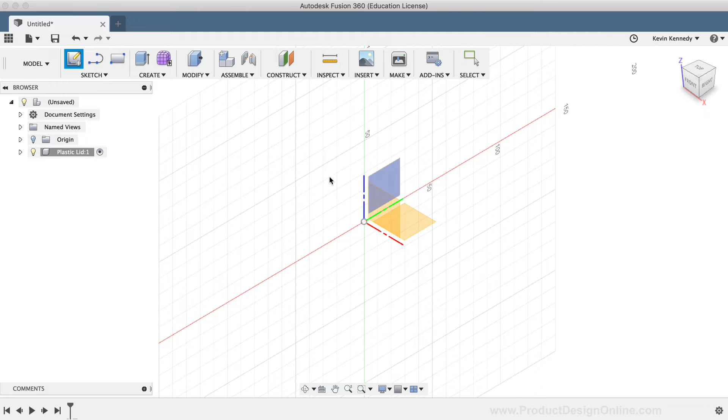Now, what I'm going to do is draw half of the side profile of the lid. Then, I'll use the Revolve tool to make the sketch a three-dimensional object. I'll click Create Sketch in the toolbar, and I'm going to select the front plane or the XZ plane.

Next, I'll hit the keyboard shortcut letter L as in Lima to activate the line tool. I'm going to draw the profile shape out and give it some rough dimensions. And then afterward, I'll show you guys how to set up user parameters which will help drive the model.

With the line tool active, I'll click the center origin point and I'll move my mouse cursor upwards. Then I'll type out 3 millimeters for the length of the line, followed by the tab key to lock the dimension in place. And finally, I'll click to set the line on this green vertical axis.

For the next line, I'm going to go to the right 52 millimeters. I'll type out 52 millimeters and then hit the tab key to lock the dimension in place. And I'll click to set this line at 0 degrees, creating a horizontal line.

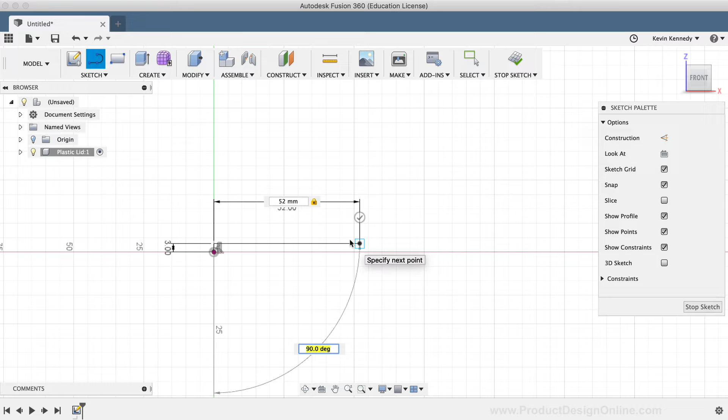The next part of the lid is raised up a bit, so I'll type out 2 millimeters for the length, followed by the tab key. And this time, I'm going to type out 70 degrees. I'll make sure to hit the tab key after the degrees, and then I'll click in the upper right-hand area to set the line in place.

Next, I'm going to create a line going towards the right. I'll make this line 10 millimeters in length and hit the tab key to lock the dimension in place. Again, I'll click to set this line at 0 degrees, making a horizontal line.

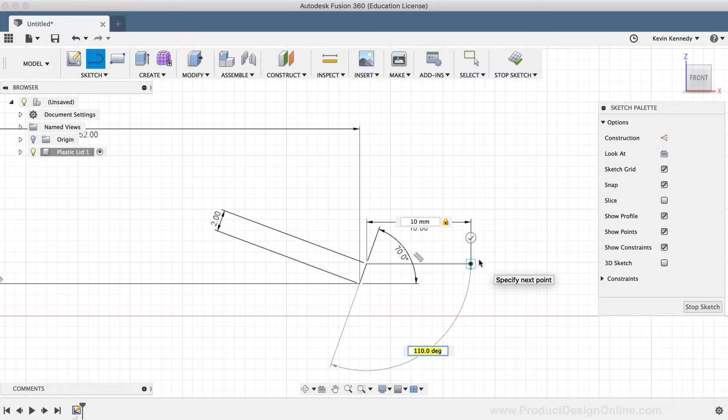Lastly, I'm going to close the profile shape off by creating a line that runs vertically until it reaches the x-axis. And then I'll bring the line back to the original origin point. Now you should see your profile change to have this orange background highlight, which signifies that the profile shape is closed or connected all the way around.

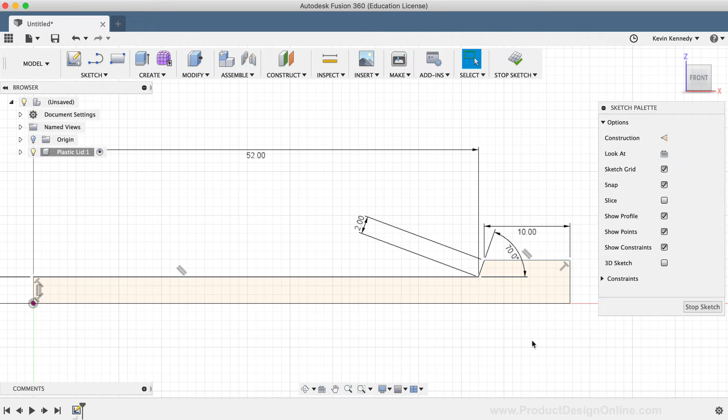Before we start to create user parameters, the last thing I'll need to do is sketch out the notch area where the lid will actually snap into place or touch the aluminum can. I'll hit the keyboard shortcut letter R as in Romeo, which will activate the 2-point rectangle. For the first corner of the rectangle, I'll click anywhere on this line.

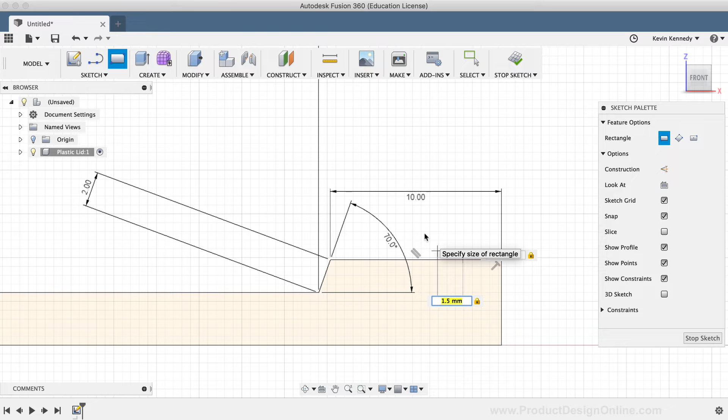Then I'm going to make the width 1.5 millimeters. So I'll type out 1.5 millimeters, followed by the tab key, and then 0.5 millimeters for the height, also followed by the tab key, and then I'll click to set the rectangle.

Next, I'll add a sketch dimension by activating the Dimension tool from the Sketch drop-down list. I'll click on the right side of the rectangle and the corner point, and I'll add a dimension of 2 millimeters. Lastly, I'll need to trim this bottom line out of the notch.

I'll head to the Sketch drop-down list and then select the Trim tool. Now with the Trim tool active, you can hover over the lines to see what the tool will actually trim away.

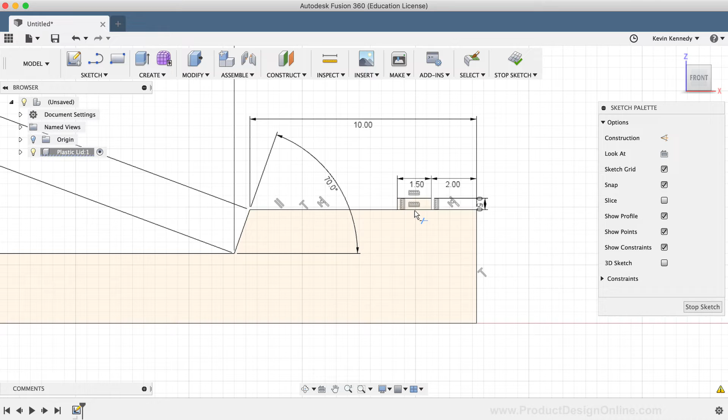As I hover my mouse cursor around, you'll notice that the lines are turning red, which signifies the part that will be trimmed away. So I'll simply click on the bottom of this notch, and you'll notice that it removed that bottom rectangle line and the horizontal constraint it had with it. However, there is still a line there from the original line that I drew. So with the trim tool still active, I'll click once again to remove that line as well.

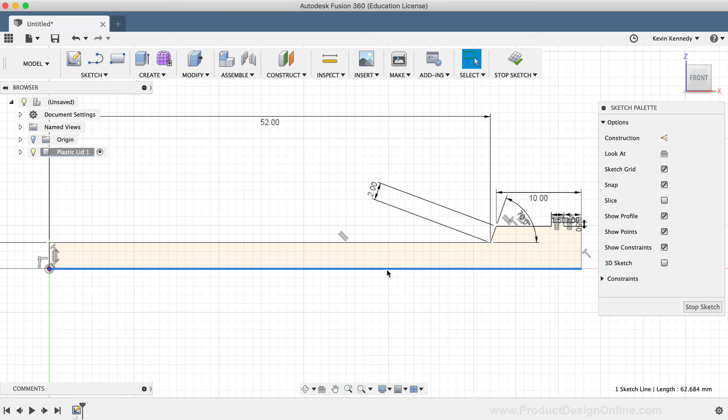The last thing I'll do before showing you guys the user parameters is make the thickness of the sketch profile. To do so, I'll use the Offset tool. But first, I want to change some of the lines that we don't need to construction lines. While holding down the Shift key, I'll select the bottom line and then the first line that we created. Then I'll hit the keyboard shortcut letter X as in X-ray to change the lines to construction lines, which will help ensure that we don't select them while using the Offset tool.

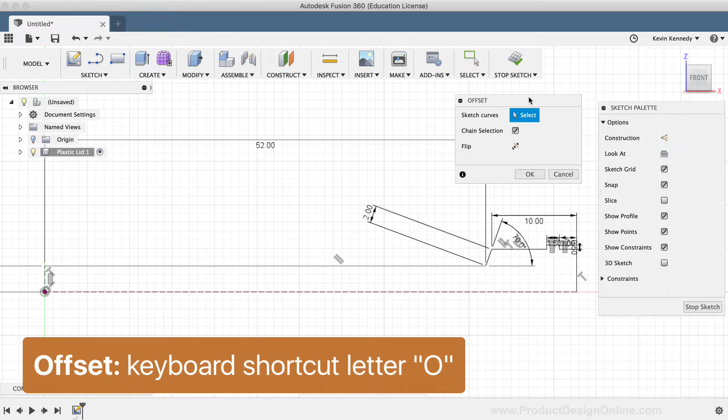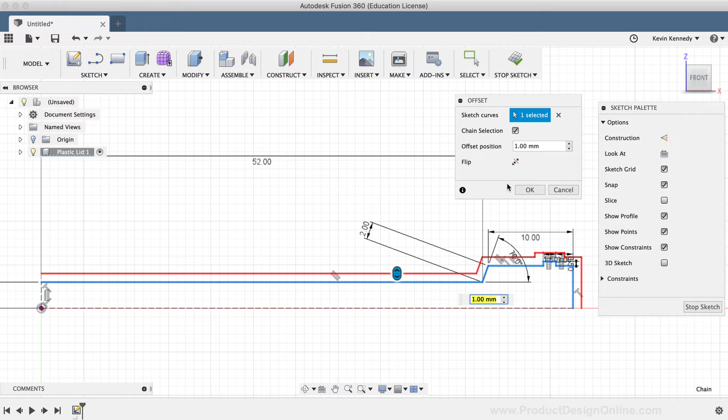I'll now hit the keyboard shortcut letter O as in Oscar to activate the Offset Sketch tool. With the Offset tool activated, I'll have to select all of the lines that I want to offset. In this scenario, I want to select the entire sketch profile, and you'll notice Fusion 360 gives us a preview of the offset lines in red. I'm going to make the thickness 0.3 millimeters by typing that out in the Offset dialog box.

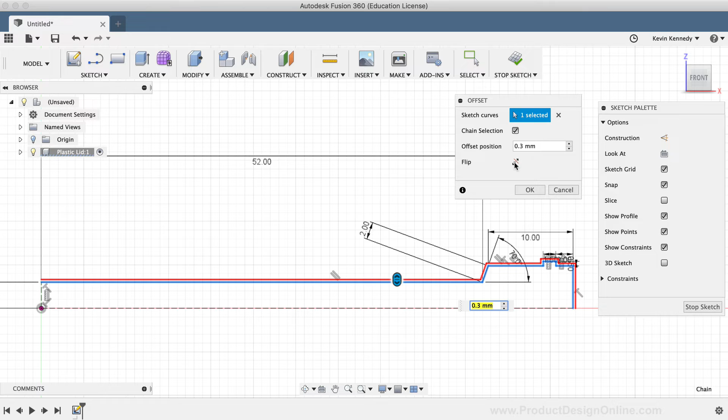Then you'll notice that the Offset command gives you the option to flip the offset lines. For this scenario, I want the offset to be on the outside of the existing sketches because I dimensioned the inside of the lid. So I'll click that flip button until the lines are on the outside. Then I'll click the OK button to confirm the results and to close the Offset dialog box.

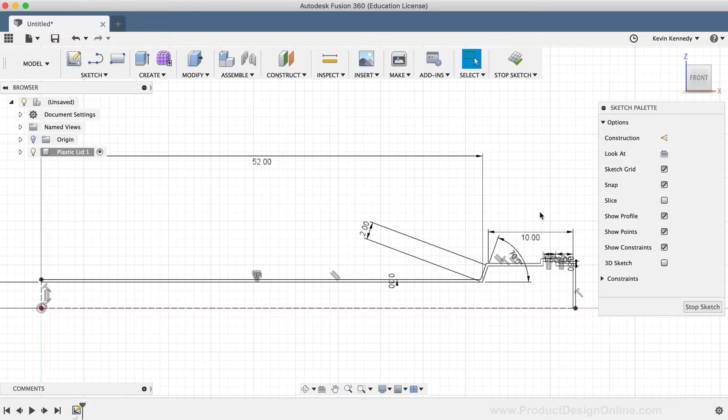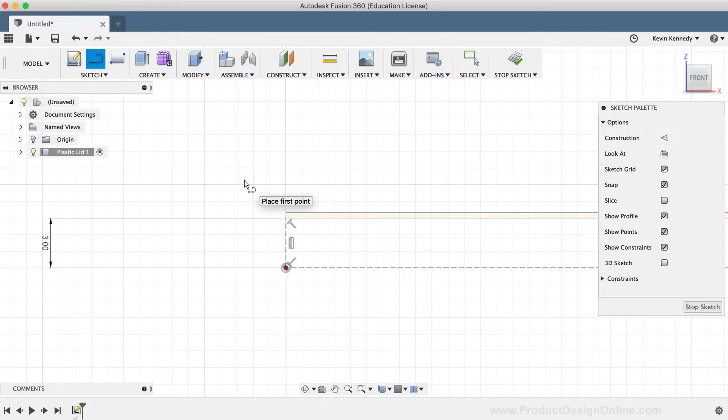At this point, you'll realize we lost our closed profile shape as we no longer have that orange background highlight. Therefore, we'll need to draw some lines to connect the ends that are open. I'll select the Line tool from the Sketch drop-down list, and I'll zoom in on the lower right-hand corner. Now I'm just going to draw a line from point to point to close this end. Then I'll pan to the upper left area where the profile shape is still open. Again, I'll draw a line from end to end to close this profile. As we now see, we have successfully done so, signified by the orange background highlight reappearing.

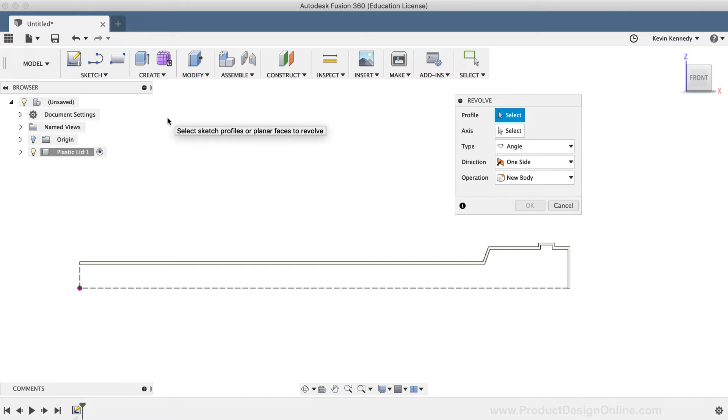I'll now select the Revolve command from the Create drop-down list. Now the Revolve command revolves a 2D sketch profile around a defined axis to make a three-dimensional shape. First, I'll need to select a closed profile shape, so I'll select the one that we just finished. Then, you'll see that I have to choose the axis for the profile to revolve around. I'll simply select the Z origin axis and then click OK in the dialog box.

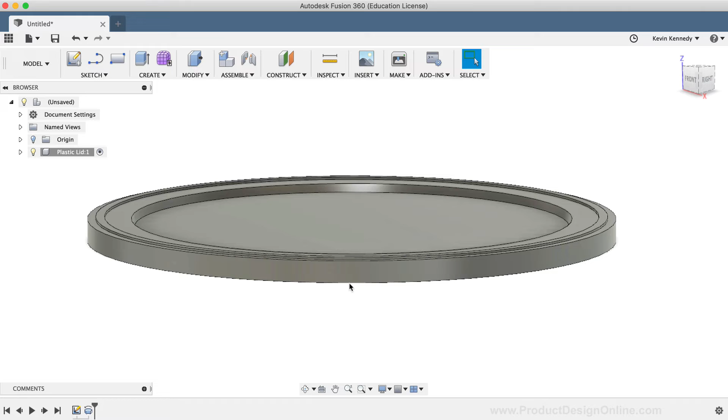Now the lid looks great, but I want to show you guys how to set up some user parameters so you can change the lid diameter and the internal thickness without having to go back to edit the original sketch. Now for reference purposes, I'm going to double click on this sketch in the timeline to open it up. Then I'll open up the parameters dialog by selecting Change Parameters from the Modify drop-down list. Once open, you'll see that we have a user parameter section, which are parameters that we set up ourselves, and just below that is the model parameters, or the dimensions already outlined in the model.

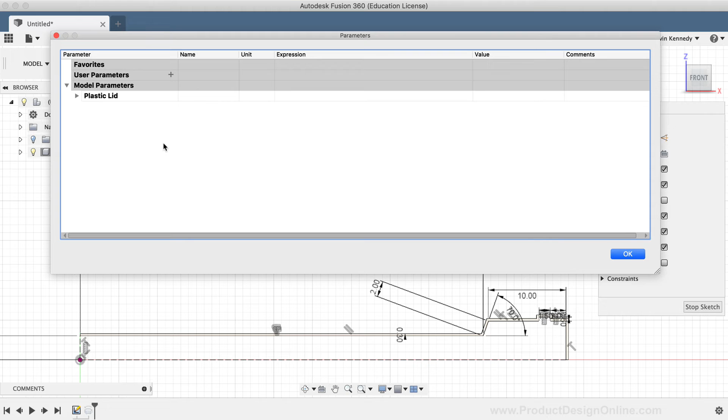To create a new parameter, I'll click on the plus symbol. For this first one, I'll create a parameter titled Lid Thickness. Then I'll type out 0.3 millimeters for the expression, and I'll click OK. Now, if I toggle open the sketch model parameters, I can select the 0.3 millimeters or that offset thickness that we set in the original sketch. I'll replace this value with the lid thickness name, and you'll see it will come up as a suggested value after I type out the first few letters.

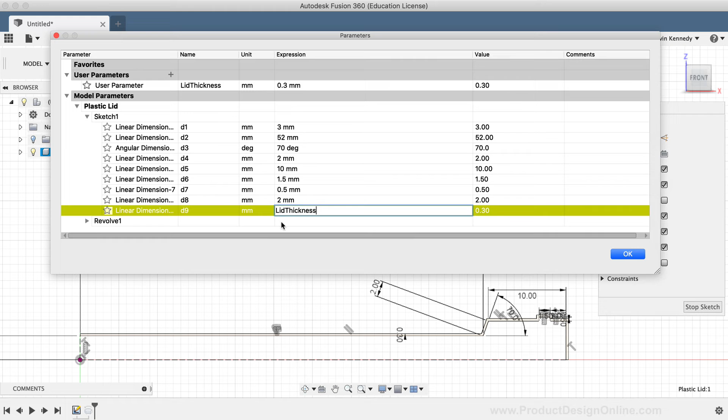Next, I'll create a parameter for the inside width of the notch, which we originally set to 1.5 millimeters. I'll title this parameter Notch Width and make this 1.5 millimeters. I'll then replace the original sketch dimension with a value titled Notch Width. I'll repeat these same steps for the notch height, which was originally 0.5 millimeters.

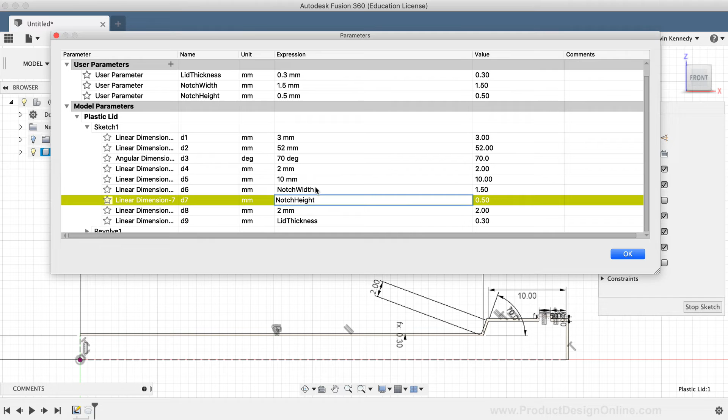Now, if I click OK to close the parameters, you'll notice in the original sketch that the offset thickness dimension and the other two dimensions I set up parameters for now have the fx in front of the dimension, showing that the dimension has a function or a user parameter applied to it. So if I double click on the dimension, it will show the name of the user parameter that is actually applied to it.

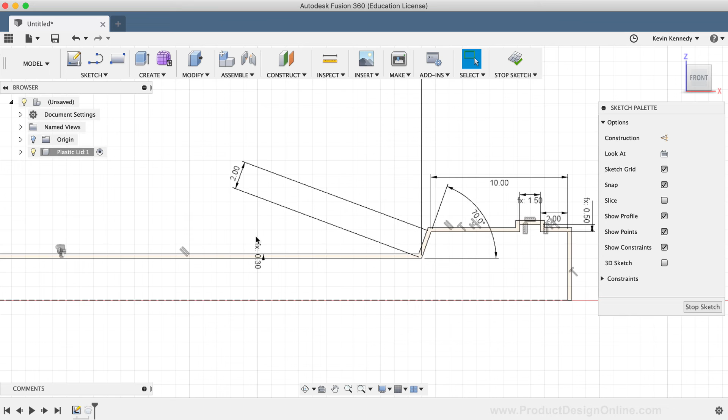The last dimension that would be useful for this model would be the inside radius of the lid. First, I'll delete the 10 millimeter dimension, which will allow me to add a dimension for the entire length without over constraining the sketch. I'll hit the keyboard shortcut letter D to activate the dimension tool. Then I'll select the inside of the lid wall and the first point on the left side, and I'll make the width 62 millimeters.

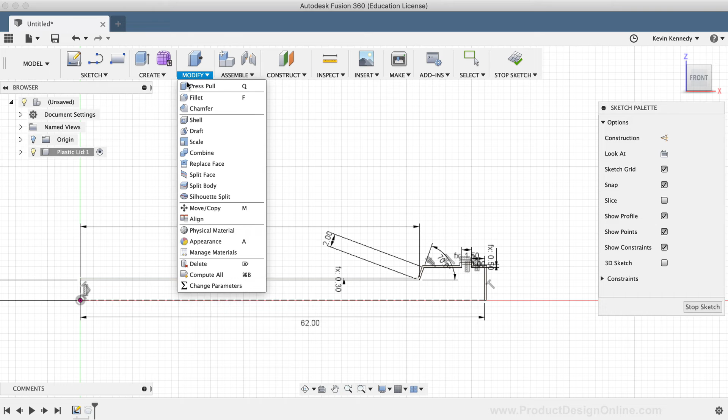Now to set the user parameter for the radius, I'll go back to the Modify dropdown list and select Change Parameters. I'll title this one Lid Radius, and for the expression, I'll type out 62 millimeters. Finally, I'll change the value of the dimension to be Lid Radius.

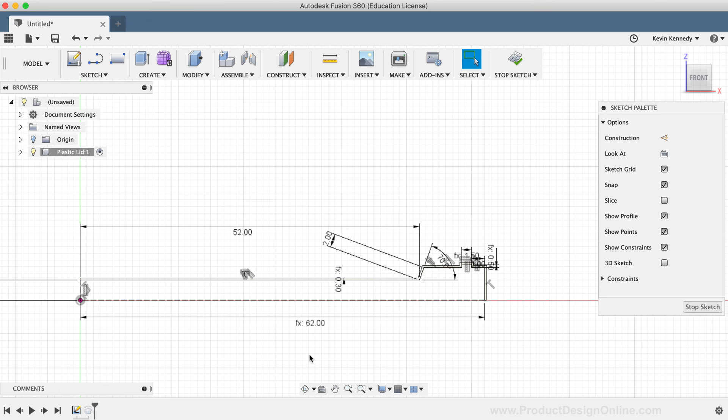Now, for the sake of time, I'm going to stop adding parameters here. However, you may find it helpful to set a parameter for some of these other lid dimensions. For now, I'll stop the sketch and make sure that the timeline is fully shown. And I'm going to hit the home icon next to the view cube to view this model from the home position.

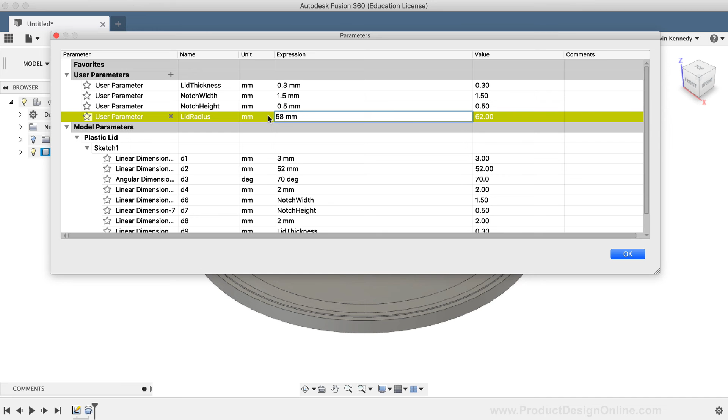Now that I have parameters set up, if I decided that I want to change the diameter or the entire width of the lid, I can simply change one of the parameters. For example, if I wanted the diameter to be 116 millimeters, I can change the lid radius value to 58 millimeters, and then I can click OK, and you'll notice that the lid is automatically updated.

As you can imagine, parameters can be pretty powerful, especially if you need to create something that will be later used in various sizes, whether it be for 3D printing or a series of different CAD models with different requirements.

To wrap up this video, the last thing I wanted to point out is that you'll want to make sure that you fully constrain your sketches with constraints before dimensions, which will help ensure that your sketch profiles don't get messed up.

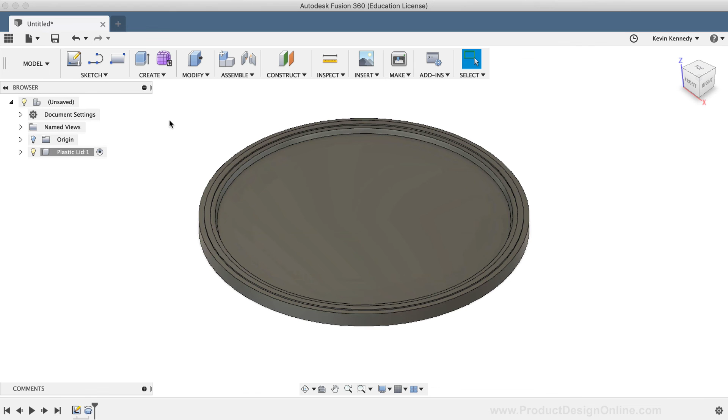Now, for this video, I did part of this wrong on purpose for the sake of learning. And to reinforce this, I'll show you what I mean. I'm going to set the lid radius to 30 millimeters, and I want you to pay attention to what happens to the sketch profile.

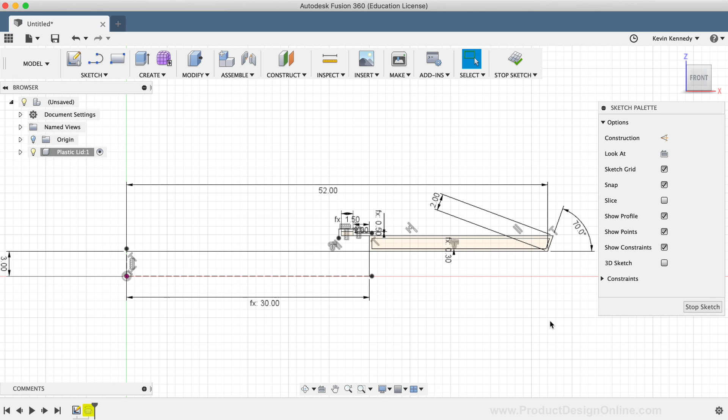You'll see that the sketch is all scrunched up and it lost the proper shape. Now, to prohibit this from happening, I'd want to add constraints to the sketch, and I'd probably want to delete any unnecessary dimensions. This would help ensure that the model or this sketch profile would update according to the user parameters without throwing off the entire model.